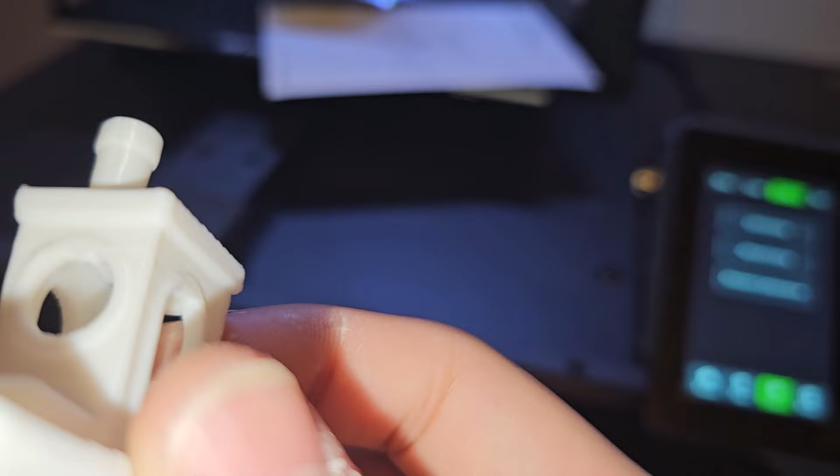Whoa, you can almost read the word behind there. 0.18 differences. Wow, wow, wow. This is actually impressive.

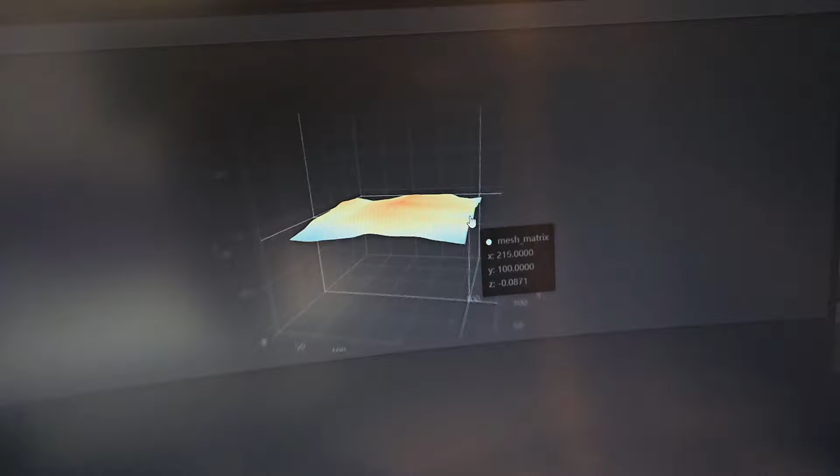I got a new 3D printer. Let's scratch today's 3D printer. This is the Artillery Sidewinder X4 PRO. The X4 Plus is not out yet, and I would love to get my hands on that one compared with this one. But for this video, we've got the Sidewinder X4 Pro.

I will first unbox this, then I will do some B-rolls while explaining the specs of this 3D printer. This video will be an unbox, review, and first impression.

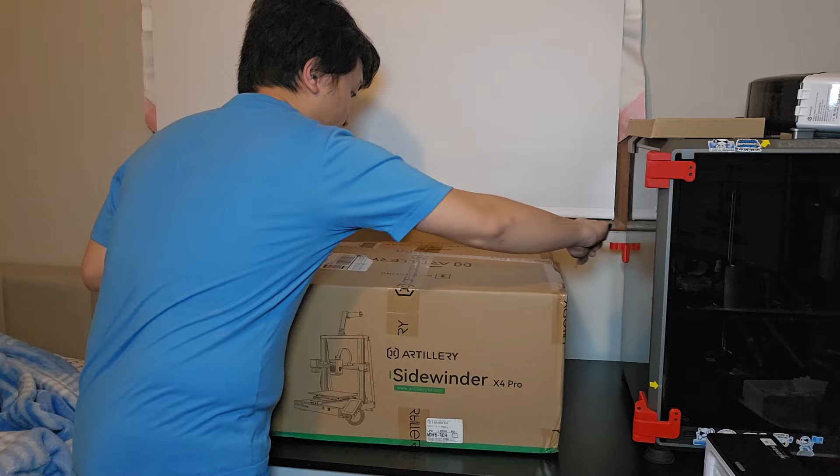You get some user manual. You get some accessories. Whoa, that is actually a lot of accessories. Okay, it comes with 2 rods, spool holder, mounting spool, 4.3-inch touch display. Okay, you got the upper parts here. Some more foam packaging. You get the base part and a power cord. Let's go.

Oh, look at that. I'm gonna go over all the accessories that you get in this package. You get a filament snipper, a filament scraper, some grease, a little filament tester. These are M4 x 18, 4 M5 x 40, Allen wrench, nozzle cleaner, USB nozzle, and some zip ties, and a tube. You get some wire clip.

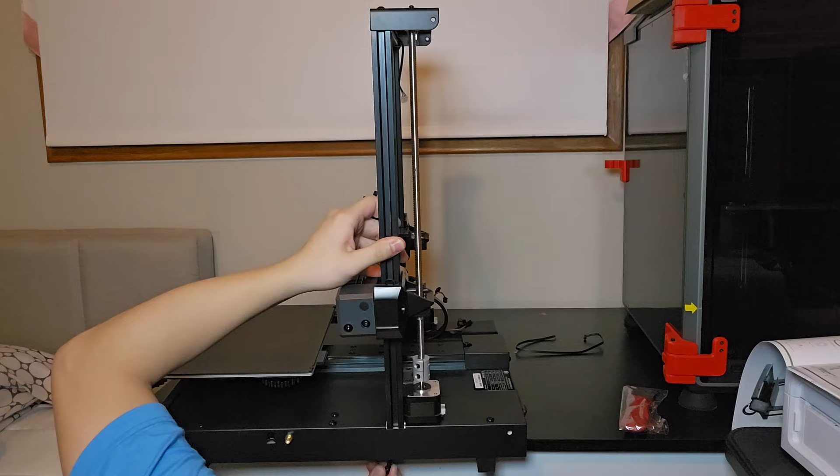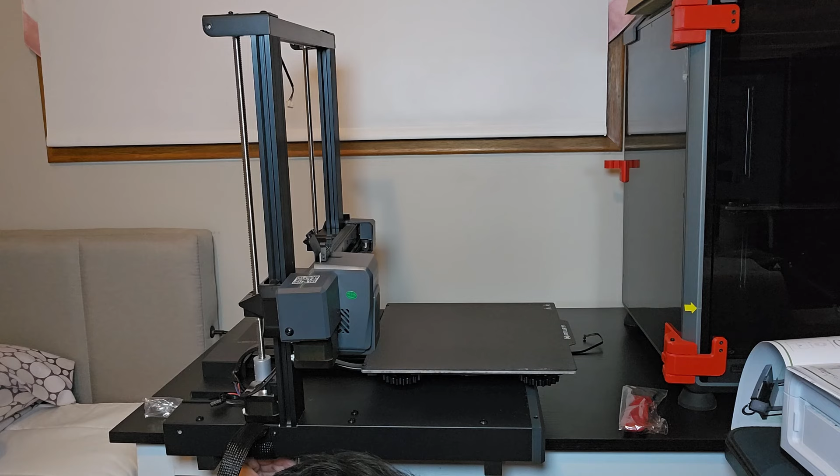Let's go. Now let's assemble this printer. This is Artillery Sidewinder X4 Pro. It has a print volume of 240 by 240 by 260 millimeters. It has a max printing speed of 500 millimeters per second.

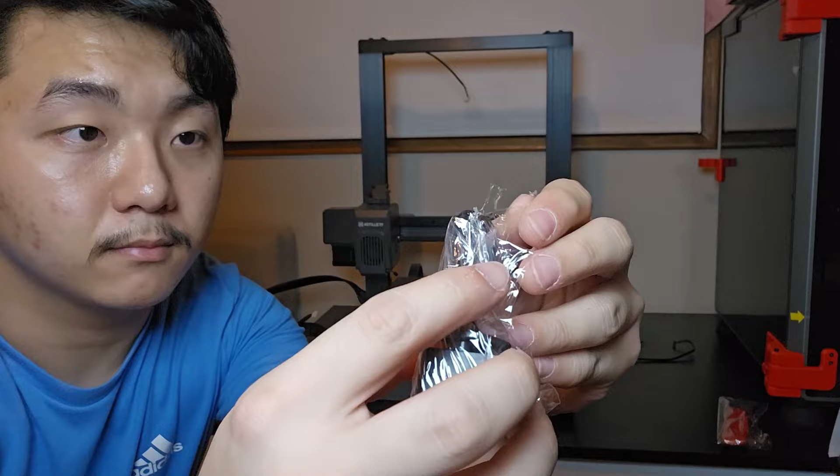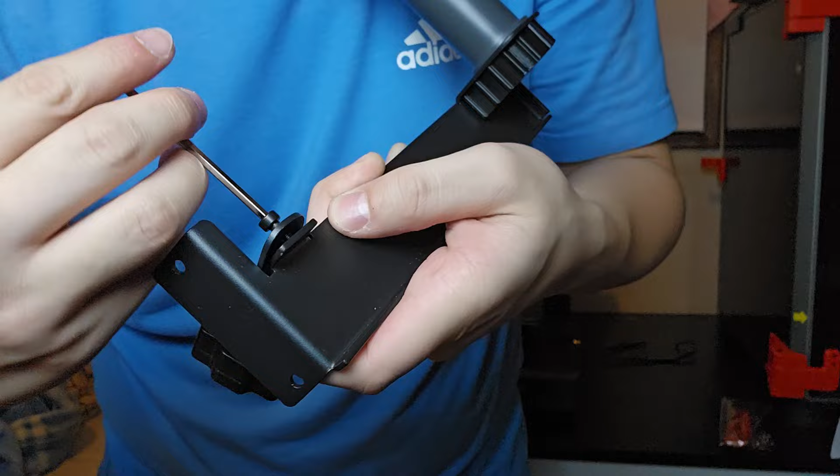It comes with Klipper firmware, pressure advance, and input shaping. It has a reliable metal linear rail structure. It has a 9x9 points auto leveling. The nozzle can go up all the way to 300 Celsius. This Sidewinder X4 Pro has Wi-Fi, USB, Type-C transfer of your G-codes. It has resume printing. Let's go.

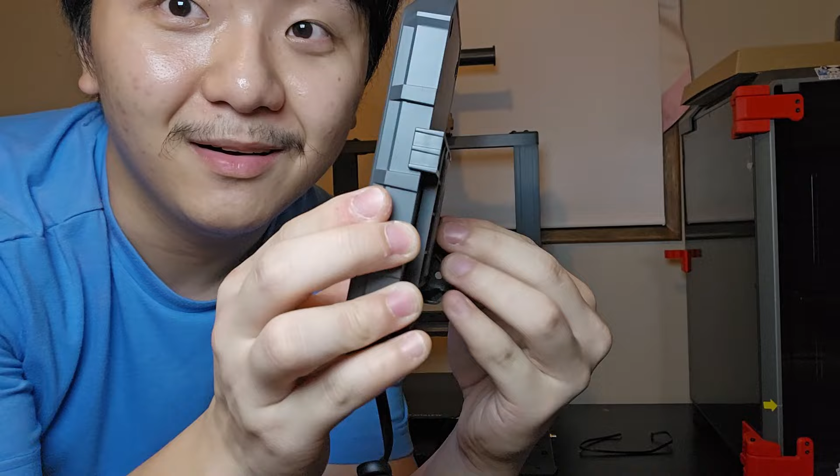Look at this. It's magnetic. How cool is that? It's magnetic. I would love to see more 3D printer companies do this with their touchscreen.

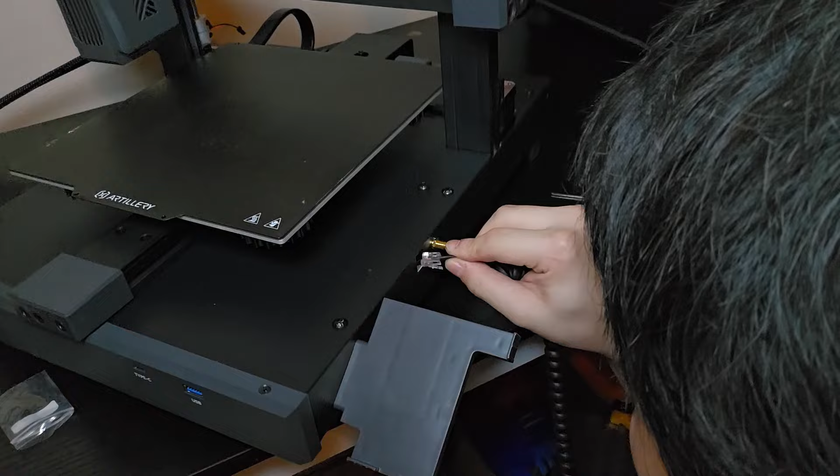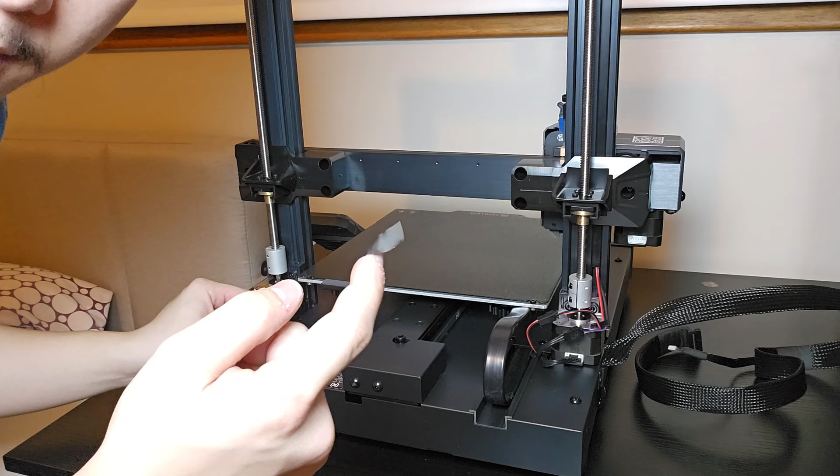It features a dual pole rod structure at the back of the 3D printer to stabilize everything. It also features automatic nozzle cleaning at the back of the build plate. This printer can accelerate up to 12,000 millimeters per second squared. It has a dual gear direct extruder. All the linear rails are all metal. Yeah, that's the spec of this Artillery Sidewinder X4 Pro.

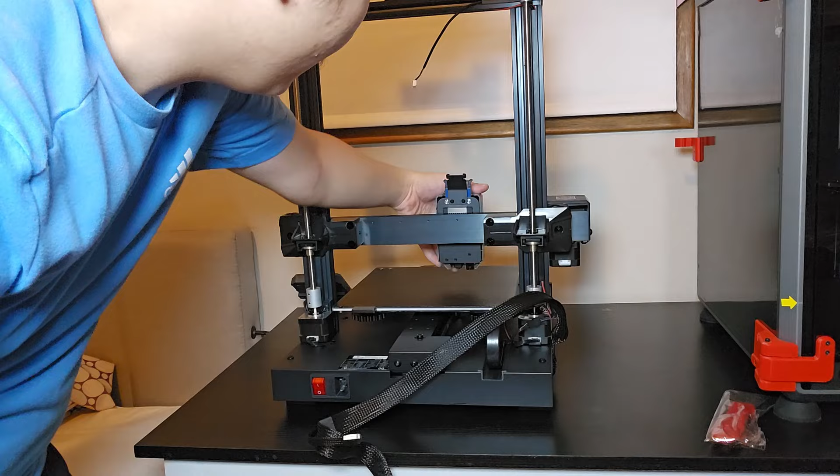Ooh, that is so smooth. There's no wobble on the head, which is very nice. It also has a clip right here to hold it. We're gonna use this R-type clamp, place it right here so that we lock this in. To be honest, I don't really think this is actually needed because this wire is long enough for the head to go all the way over here without interfering with this wire, but it's good to have.

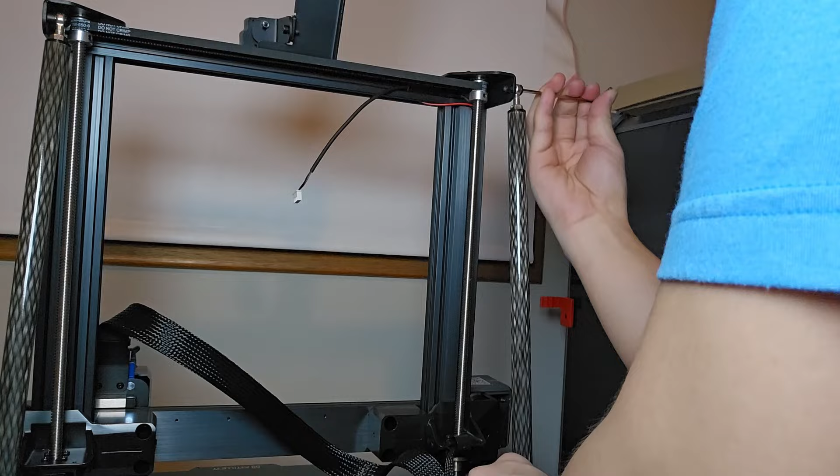Now we're gonna install this tie rod. We just need to secure these bolts so that it's not loose. Okay, well, I think we are pretty set, but in their instructions there's nothing about this wire up here. I believe this is for the filament runout sensor, but the instructions don't cover that. So I'm just gonna plug it in right now.

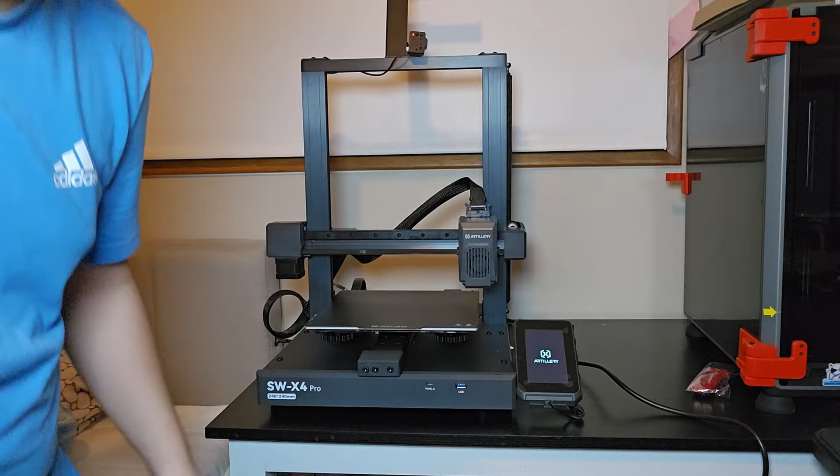We are complete. Now we just need to power this printer and we will go for our first test. I'm gonna turn it on. And would you look at that? It's working! Oh my gosh, let's go!

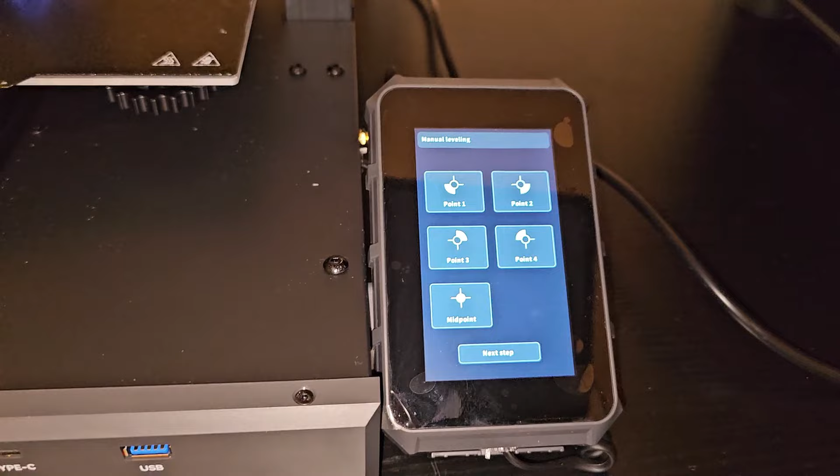Whether to enter the boot interface. Yes. It's actually telling us to do manual leveling, so I guess I'll go over this procedure and we'll get right back to you.

After I manually level the bed, now it will auto level the bed. Now it's saying something in Chinese. I don't know what it says.

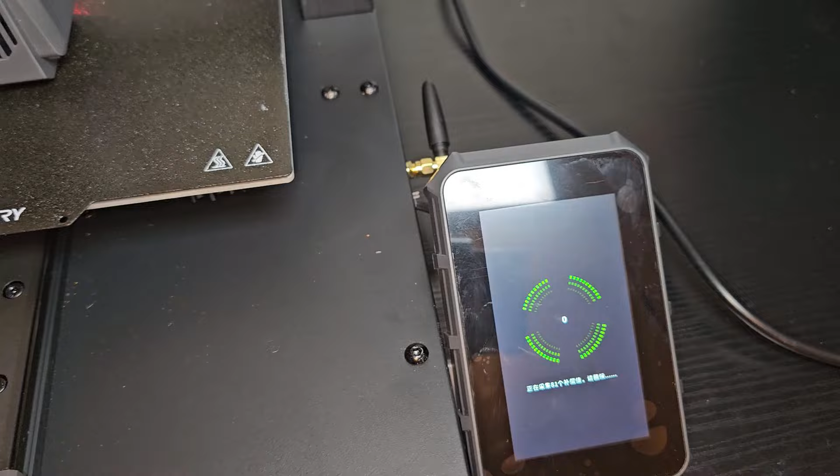This Artillery Sidewinder, you just put this in and then you just click load on the screen and it will just auto load in the filament. It doesn't have a latch to lock and unlock.

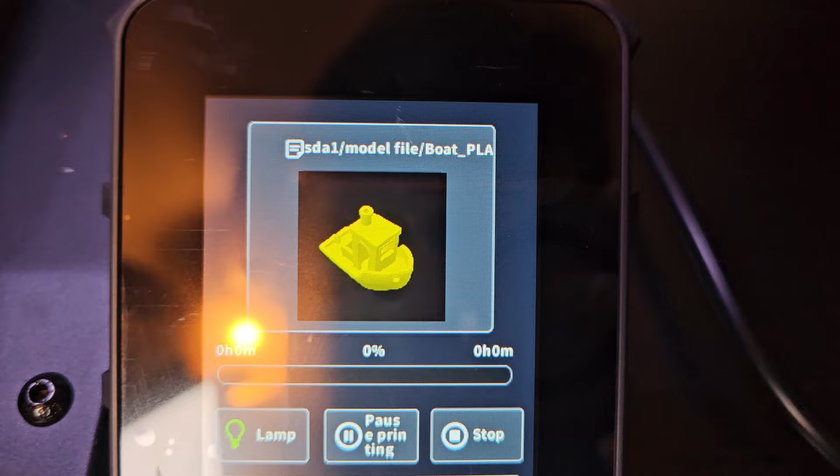Okay, so before we get printing, this Artillery Sidewinder is using Klipper firmware and you have a Fluidd interface here. Okay, right now I'm printing the Benchy, which they call it boat PLA.

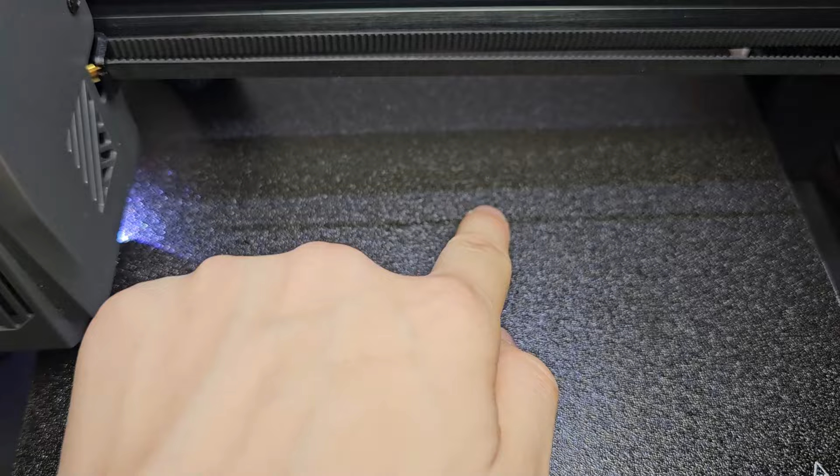Holy frick, what happened there? Yo, look at that. What the heck? They just dig into the bed like crazy. What happened?

Why does it keep doing that? I gotta emergency shut down the printer because it keeps hitting the bed like that. Bro, this printer's problems. Why does it keep hitting into the beds like that?

Okay, finally did the auto bed leveling. I was confused why it did not do it because it says that it has an 81 point leveling, bed leveling. I was confused why it did not do it. Now it has done it.

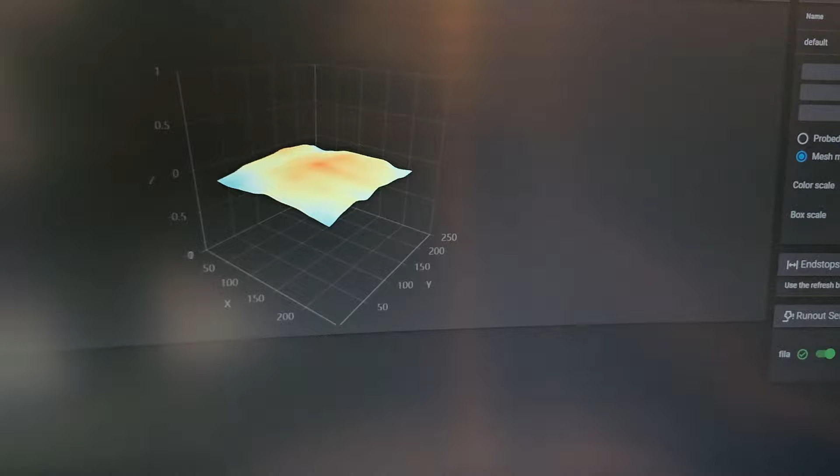Let's save it. Let's restart Klipper. As you can see the bed leveling right there, it's actually pretty darn level. It's only the middle portion that's kind of bendy upward, but everything else is perfect. Look at this, it's a range of 0.18 differences.

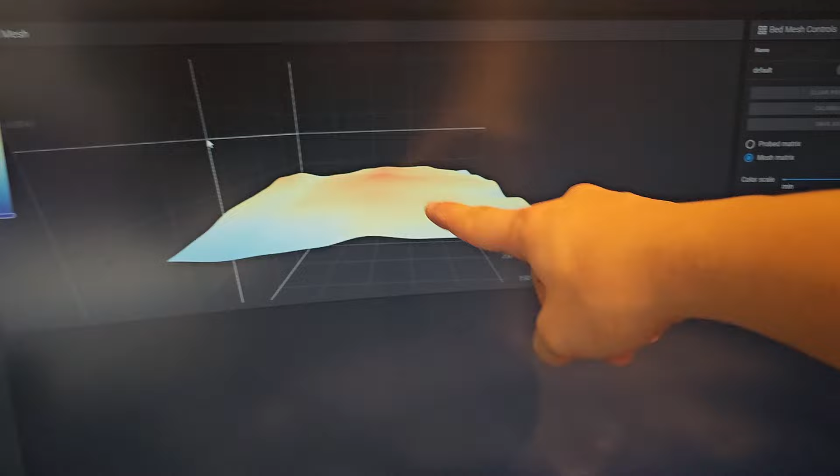Wow, this is actually impressive. Look at the bed, that is so nice. Hopefully it will just offset the middle part a little bit, but oh my gosh, this is a really good bed leveling system. So let's print and see if this will correspond to the printer.

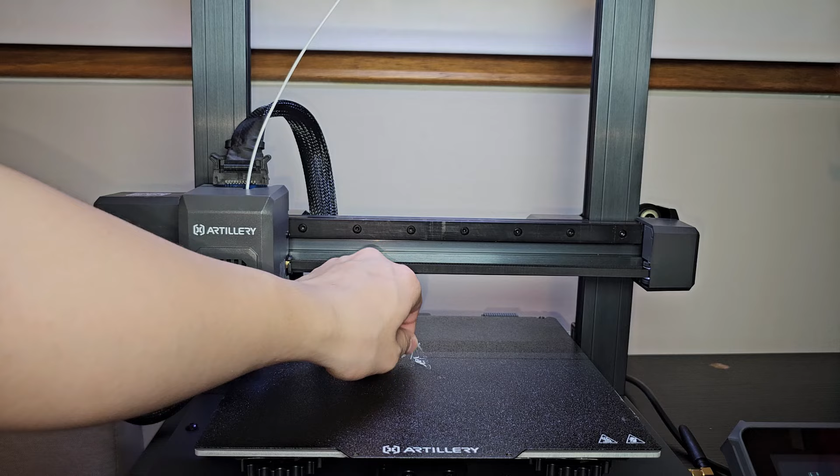Let's go. Okay, apparently it was printed way too high. It's not adjusting to the bed. Let's do one more print and see if this will work. Okay, that's so much better now.

Okay, that seems perfect. The Z offset seems perfect right now. While this is printing, I am going to their artillery slicer, and it's apparently a copy of Prusa slicer.

So it's like something is scraping. There's something that I forgot to take off.

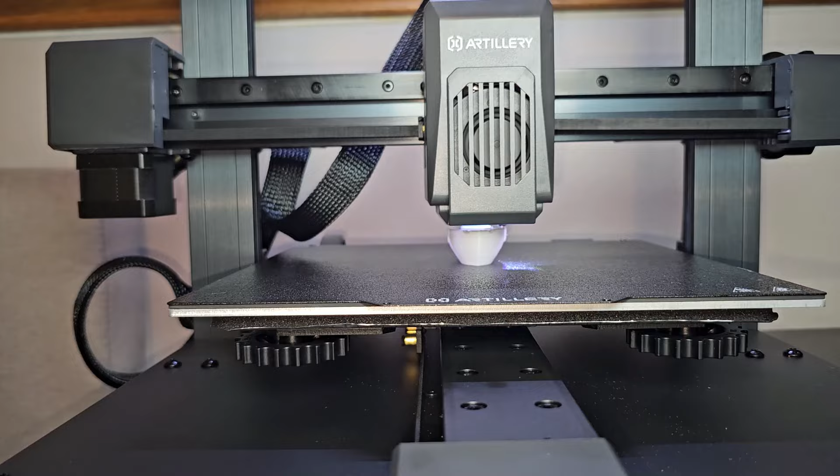Okay, well, it's done printing. You can see that it took 40 minutes exact. Try taking this off. Okay, remove the build plate and just pop it right off.

Woo, that's amazing. I'll show you how this happened. Then we will take a look at the Benchy. I'll show you exactly how the bed leveling happened.

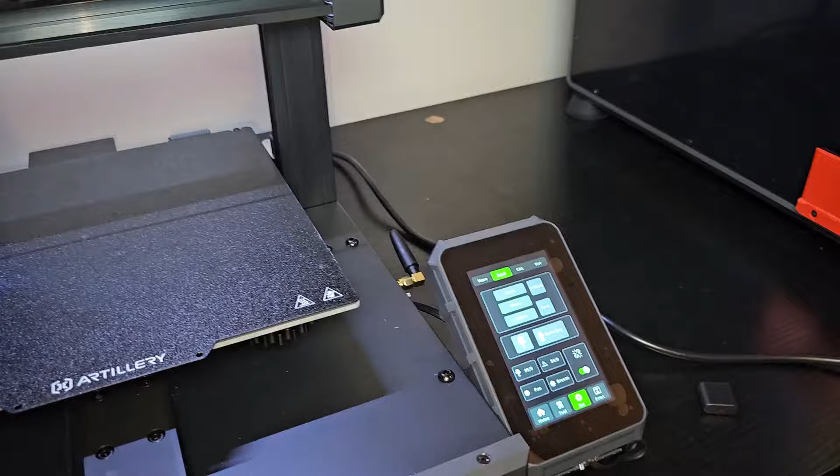So we go to Cal right there, and then we go to auto leveling. Yes, then it's gonna do its auto leveling, but it has a manual level in there too. Then it goes to a certain height.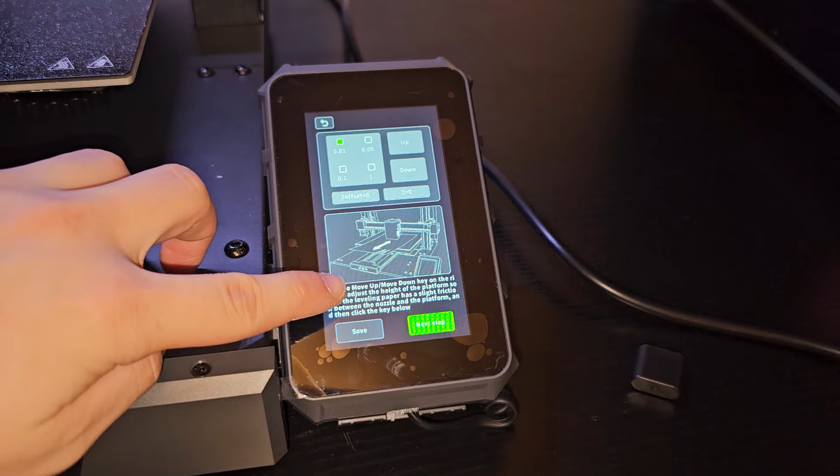Then on the screen here, if you can see that, it says use the move up and down key on the right to adjust the height of the platform, so that the leveling paper has a slight friction between the nozzle and the platform. And then click the key below.

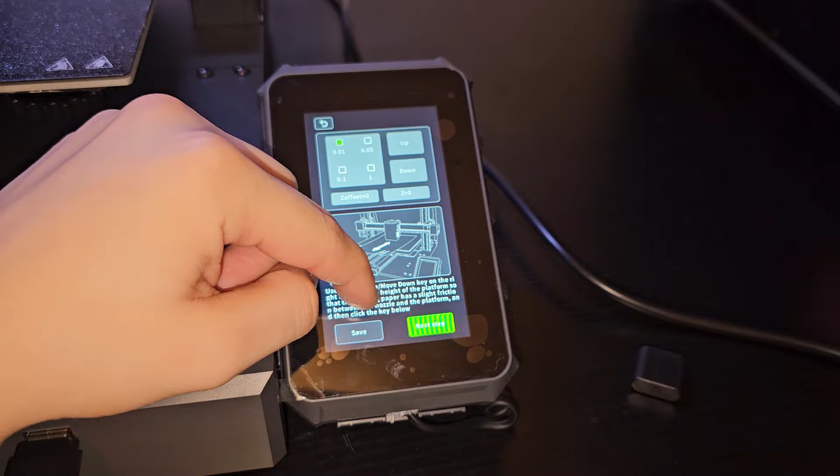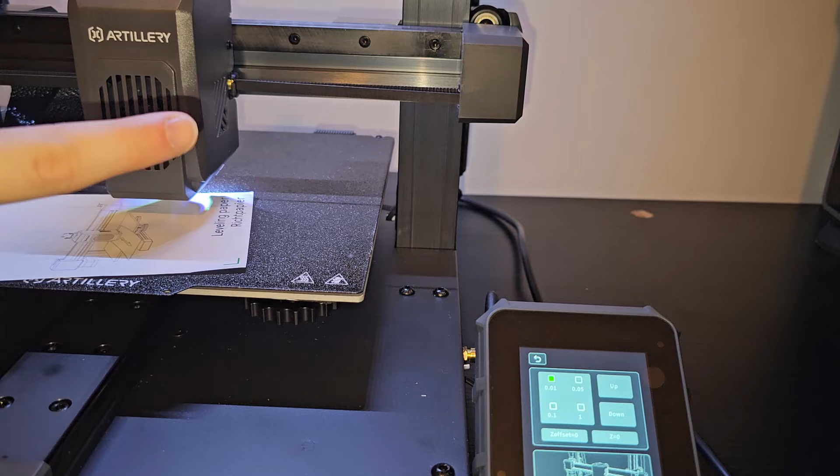You're supposed to use their leveling paper here to do that with the printer over here. But as you can see here, it's almost like a finger thick, so it's like almost 10 millimeters off. So you can't even do it.

I use the up and down arrow key like they say down here. I move it down until my paper is level, or until this nozzle is hitting the paper and I have a little friction.

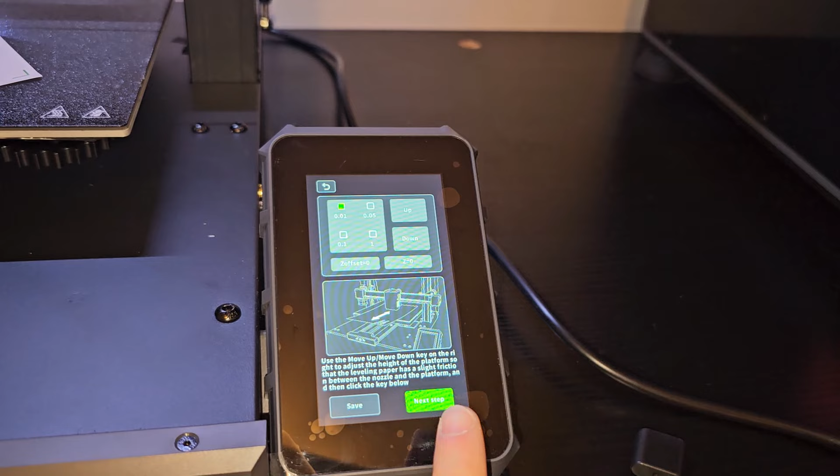So then once I got that, I click next step, and then it gives you the error your Z axis is lower than your Z offset, and that cannot happen. But it doesn't prevent you from printing anything.

So if you print, it's just gonna do what it did earlier. It's just gonna go straight into the bed and just destroy or damage your build plate.

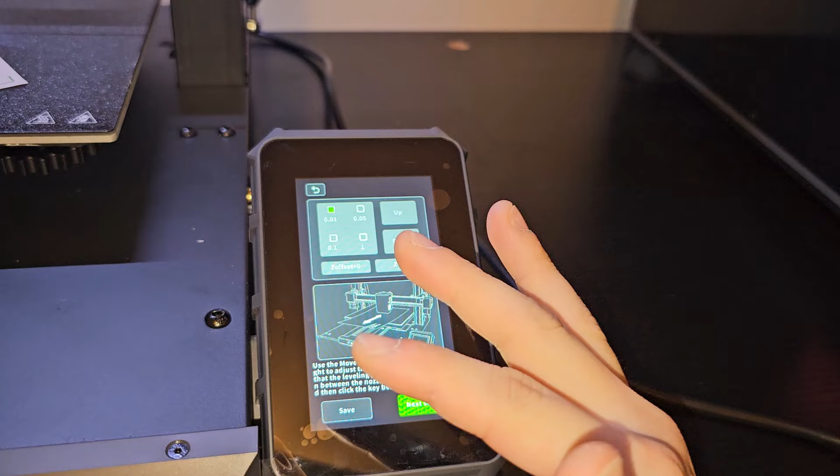They should make this auto leveling a little bit better. You doing it manually right here, I don't mind that at all, because like you saw earlier, you get a really good flat build plate.

But the problem is it doesn't limit you how low you can go. So you can just keep going down until you get friction on the paper, and then that's already way too low. Let's say this hitting the bed is 0 and this is like 10 millimeters off. You go down 10 millimeters right in this screen, that's like -10. So that's way lower than the bed, and the machine doesn't tell you that right here.

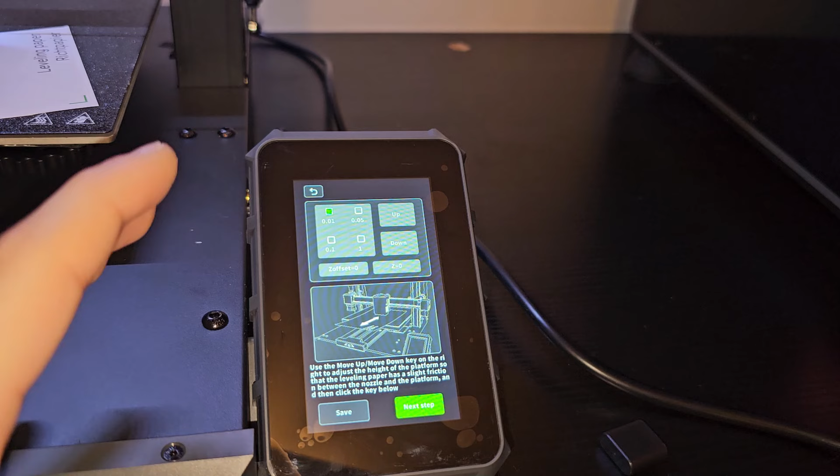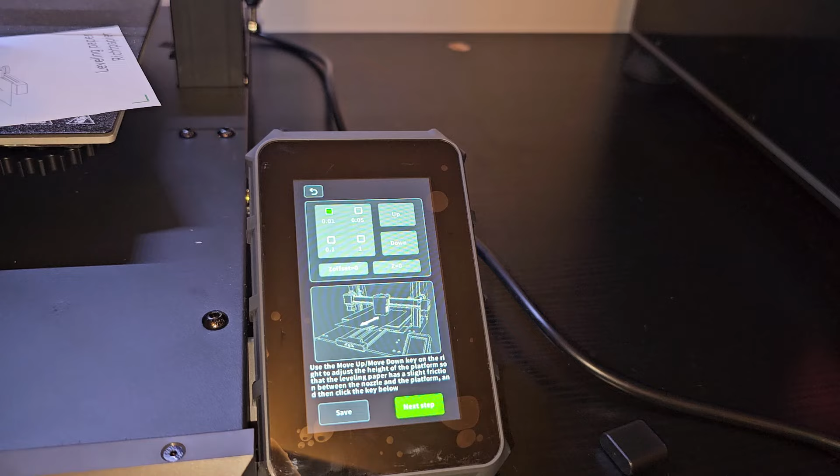Oh, there we go, the fan finally turns off. The printer doesn't tell you right here, so you don't even know that. You just keep clicking down until your paper has friction, and then once you do that, you click save. It's just gonna be way too low, and that's what happened. Your print head is gonna dig into your build plate.

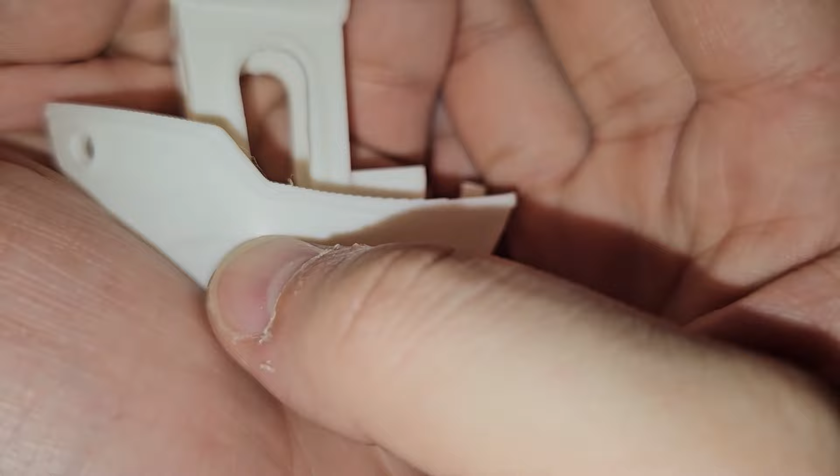Let's look at the Benchy. It actually looks pretty nice. You can see right there, it's like a little black layer right here, which I'm not quite sure about. Maybe that's just the infill. But the side looks nice.

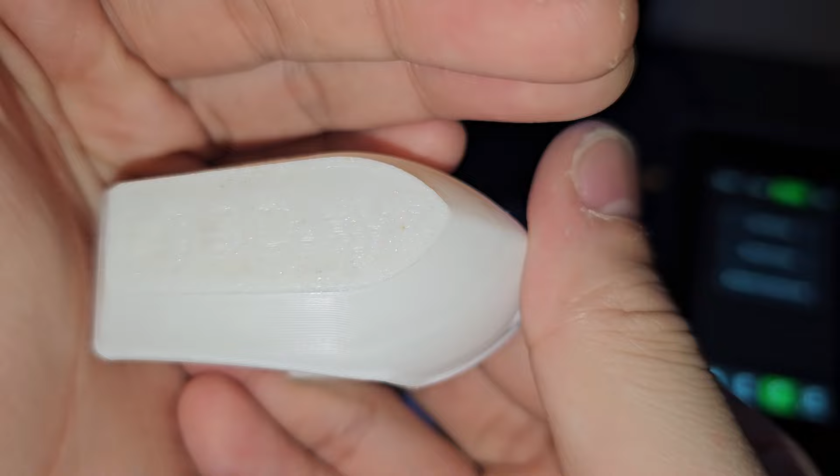The bottom isn't that good because the Z offset was kind of off. I gotta adjust it. It has some stringing right there.

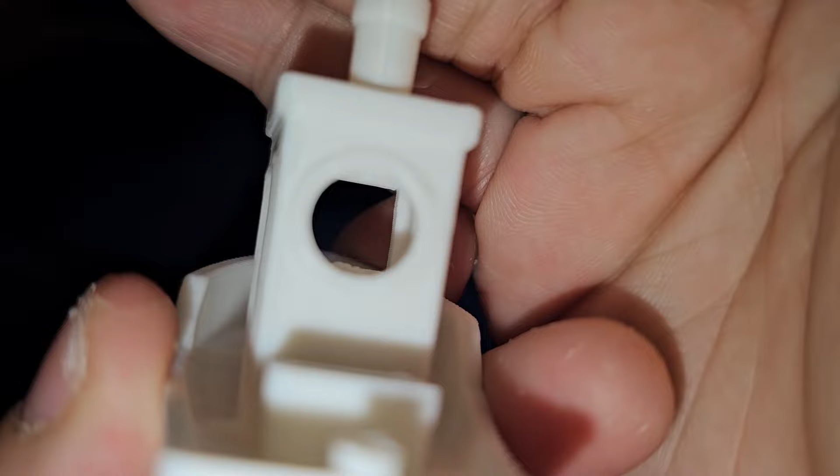Let's look at this bridging. Wow, that's actually a pretty clean bridge right there. But the back hole right here, it's not that clean. You can see that it has a blob right there.

The top of this looks pretty darn good. The circle looks pretty darn good. Look at that, the top layer finish is really smooth. All the top layer is nice.

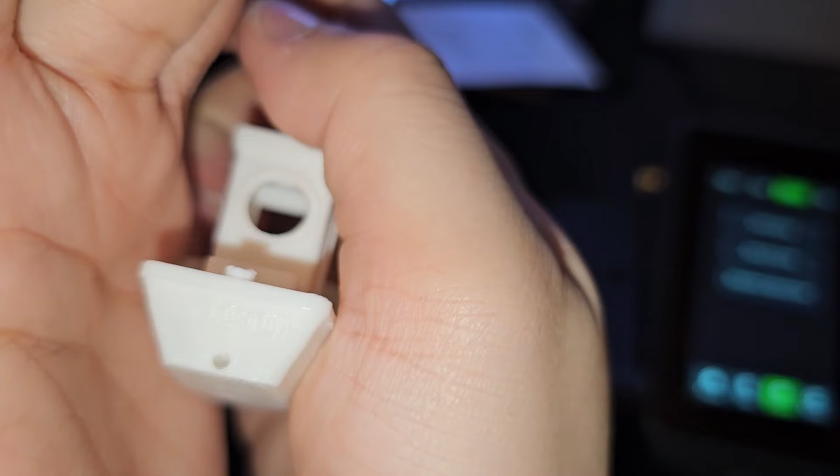There's like a layer shift right there. Whoa, you can almost read the word behind there. Wow, that is very accurate.

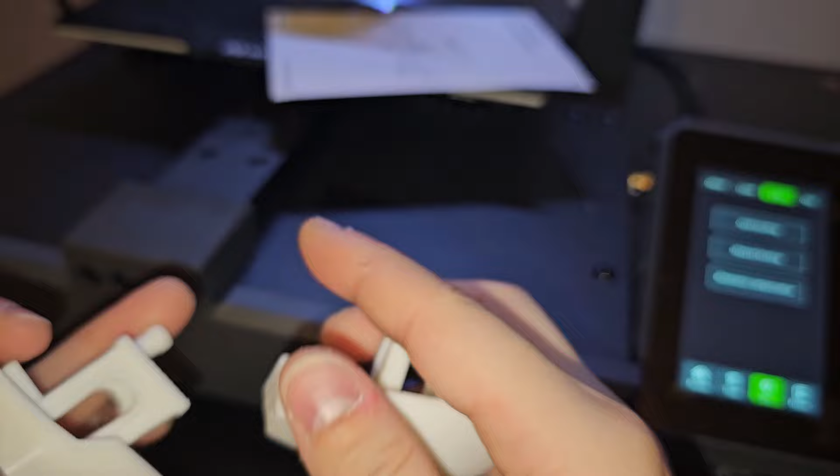Okay, this one is from the K1 Max. And you can see, pretty similar. On the K1 Max, you can see that it has this ringing right there. It has the ringing, but for the Artillery one, it doesn't have the ringing. It's just a smooth layer. Wow, you can see the light reflect off of it.

And on this, you can see that it has a ringy layer. What? Are you kidding me? This Artillery printer is that good?

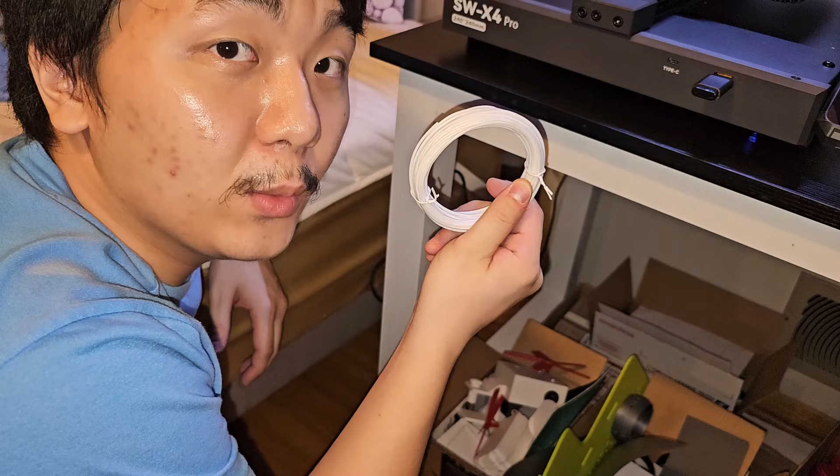Wish they would just give you a full roll of filament instead of this. Instead of doing like this, if not a full roll, at least give like a 0.5 kilogram filament in an actual roll of filament instead of just doing this.

Okay, it's done printing this thing here, but for this I was using Orca Slicer and it doesn't have a preset for this specific printer. So it doesn't know where to park, where to start. It basically just starts printing. It doesn't do the purge, it doesn't do the wipe. I need to get that figured out, but let's take a look at this. It basically finished on top of the print, which is not good.

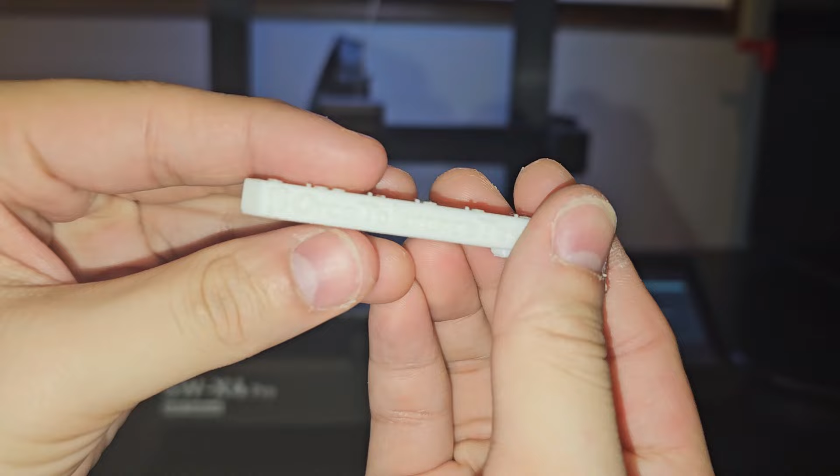This is the Orca tolerance test. We can see that the number is showing up clearly. I did not change anything besides the infill.

0.4, it goes right through. 0.3, it goes right through. 0.2, it goes right through. 0.1, it gets in there, but you can still push it right through.

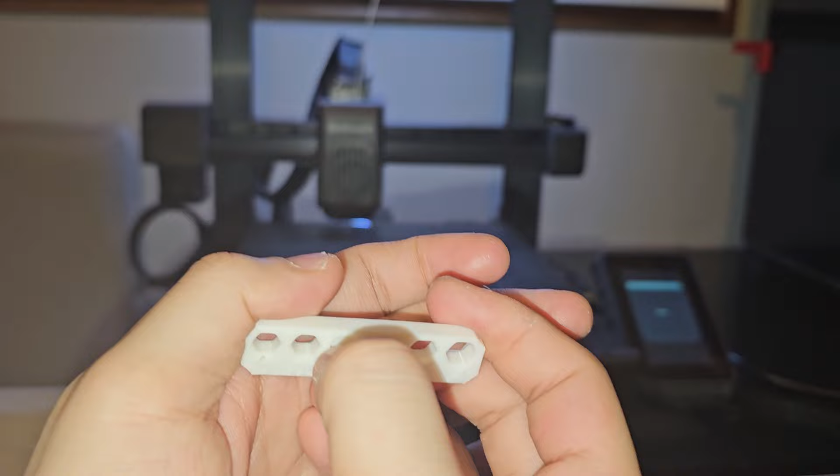Let's see at 0.05. Okay, oh, a little bit of struggle. Okay, 0.05 is stuck, really stuck in there.

Okay, what about 0? Can it fit at 0 tolerance? Let's try the other side. It can, it can. You can force it in there, but it's not like the best fit. It fit, but it's like, oh, you gotta really force it and it doesn't really go in there.

Oh wow, the tolerance goes down to 0.05. It's in there, but it kind of messed up the first layer because the first layer wasn't good on this one. I need to adjust the Z offset again. I don't know why, I need to keep adjusting, and now it's saving, but it's not loading in.

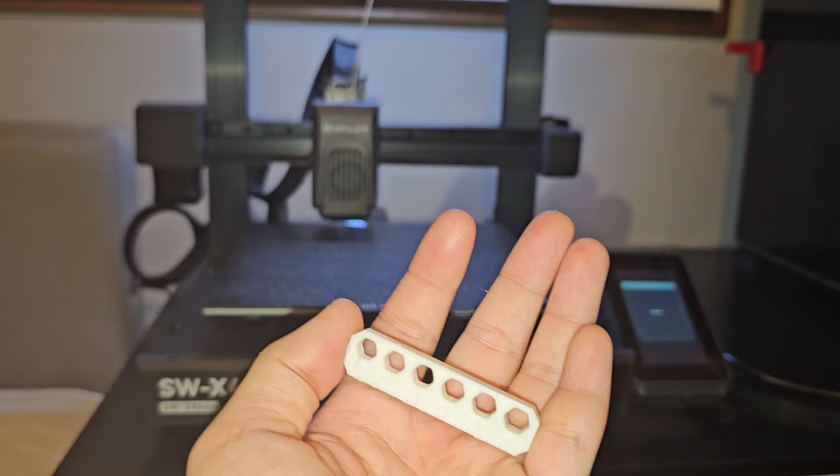The tolerance test is a pass for me. Considering this is printing at, the first layer was 0.05 width, so it fits.

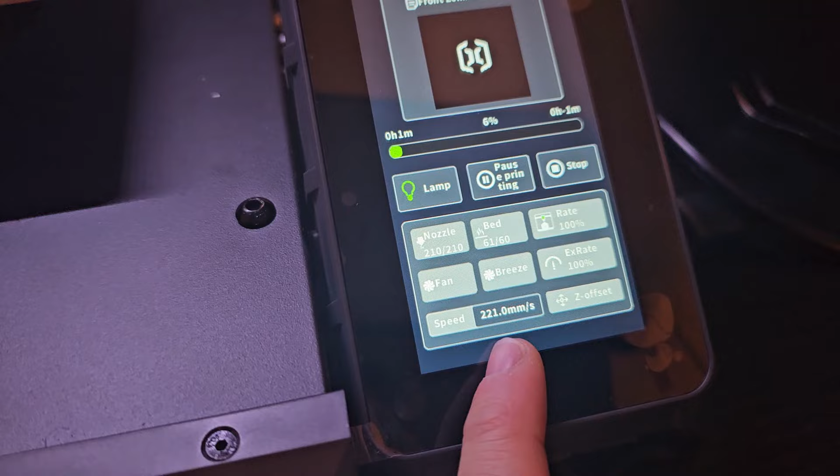So that's really nice. Okay, so for this test, I essentially crank up the speed all the way to 500. It shows you the speed that it's printing at. It's going at 1,000, you see that it's going at 1,000 right there. It just changed. 840, 221, 1,000.

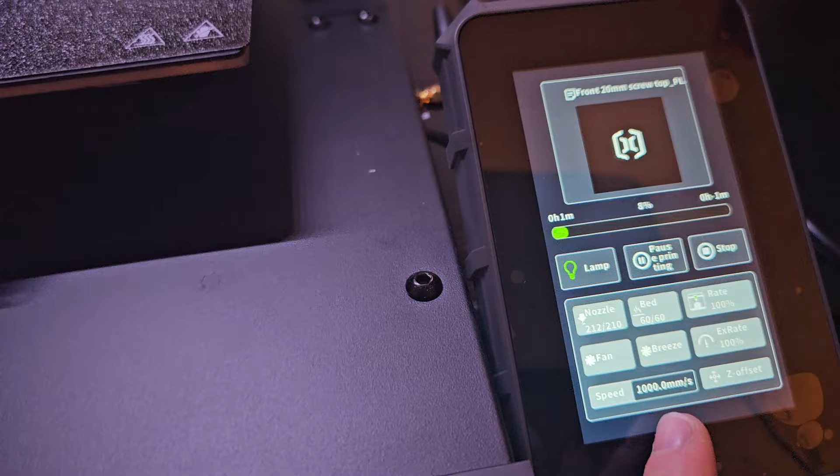Okay, let's look at the 3D printer's printing. Okay, next I will be printing this, a first layer test. I'm using Orca Slicer. It's gonna take about 27 minutes. The speed is gonna be at 105 millimeters per second.

So let's get printing. I have been playing with this Artillery Sidewinder X4 PRO for 2 days now. I basically almost stayed up for the whole 2 days, but that's besides the point. Let's take a look at what I have printed.

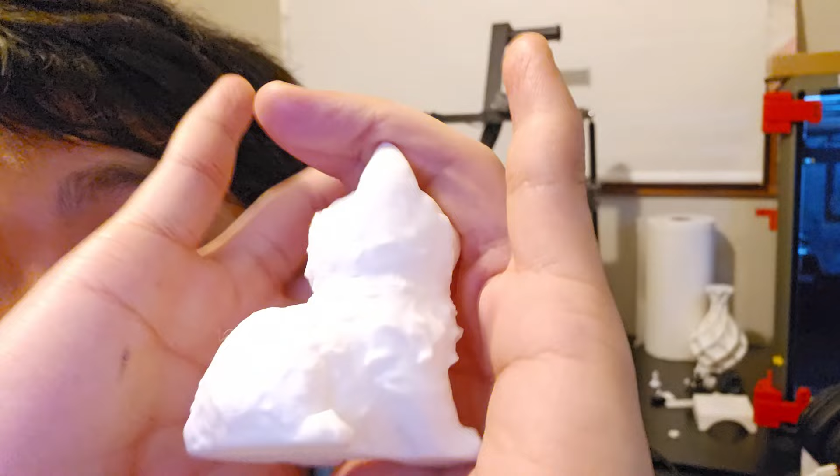I printed this thing that comes with the printer on the USB. The detail in this thing is amazing actually, you can really see all the details. There's a seam right there because the filament that they provided was only this much and it ran out, so I used Elegoo for the other half, and as you can see, it matches perfectly, which is nice.

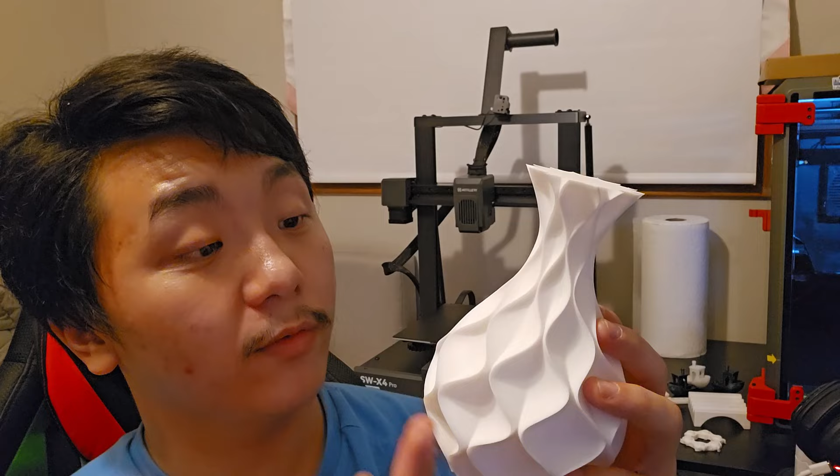That is so nice. The infill is not that much and the top layer even is very good. I also printed this vase. It's a solid vase, it's not like a spiral vase, but I printed this vase and it turns out beautifully. This is one of the most beautiful 3D print models I had ever printed.

I'm not even joking. If you look just like one hand away here, you can't even see the layer lines. It's actually that good. Even with all these curvy shapes, there's like minimum ghosting and stuff like that. If you really look at it, you can see it.

If you just look at it from far away, you can't even tell that it has layers. Even the top layer is pretty good. It has a good infill, only like two lines, and it actually printed the top infill so nicely.

The bed mesh for this Artillery Sidewinder X4 Pro is absolutely insane. With the manual adjustment and then the auto leveling to get the bed mesh, it's amazing. I love that, kind of wish every printer has this feature. It has a wheel at the bottom, you can adjust the 4 sides, and maybe the middle too. Who knows? But oh my gosh, it just printed so amazing.

So essentially this is a speed printer, right? It's rated up to 500 millimeters per second, acceleration up to 12,000 millimeters. But I cranked that up to the maximum it can do, and this is how it printed.

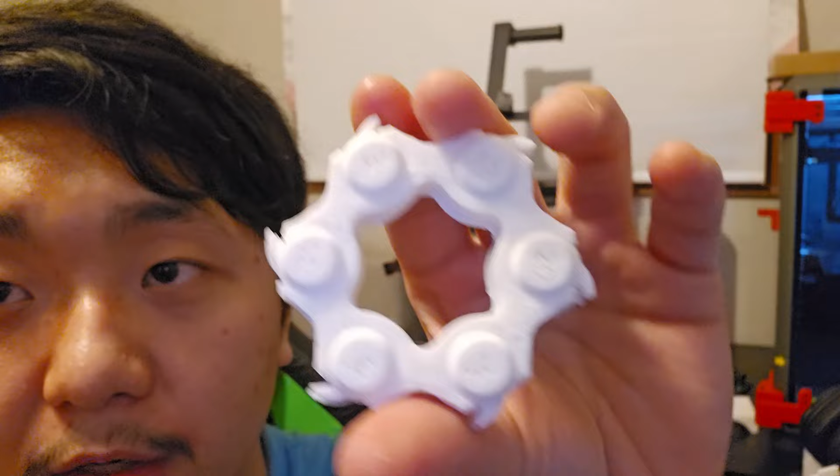I was trying to print this tolerance circle thing, but when you crank this machine all the way up to maximum speed, this is what happened. The layer keeps shifting like this. The first layer is like that, and then the other layer shifts over. It's consistent throughout all of them. I tried restarting this print 3 to 4 times, and the same thing keeps happening. I'm just gonna let it finish. So that's what happened. I was modeling this screw tester thing, but I did a bad job of it.

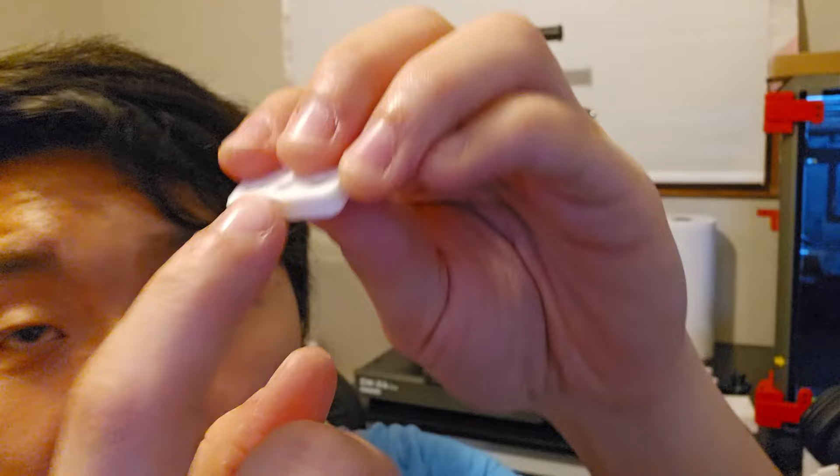But I just want to show you this. It keeps layer shifting like that. The first layer goes down, and then the second layer shifts up. It's not that it's not sticky to the bed - it's stuck really well, but it just keeps shifting. It moves way too fast, and then it just shifts the layer.

This thing cannot be completed without a full bed test. The corners aren't precise to how you manually level them, and they're not actually precise to how the bed mesh shows on Fluidd, because the bed mesh is really nice - it's only 0.2 millimeters off. Without any tuning or Z offset tuning, it should move down in this area and up in this other area, but it doesn't really do that.

I was testing this piece like 3 times, and almost the same thing happened. I had to adjust the Z offset manually. It started on this piece down here - it was really close to the bed, so I made it go up, up, up, and then it was way too high. So I made it go back down a bit, and it printed perfectly in this area until it got to the middle part, and then the two corners where it has the screw adjust on the bottom, it started printing like this. But after that part it continues really nicely, and then it gets near the other screw where you can adjust from the bottom, and it just starts to act up like this.

But it's still very good. If you just print in the middle area, it prints amazingly. With more tuning, I might actually get this printer to print the whole bed like this, to be very honest.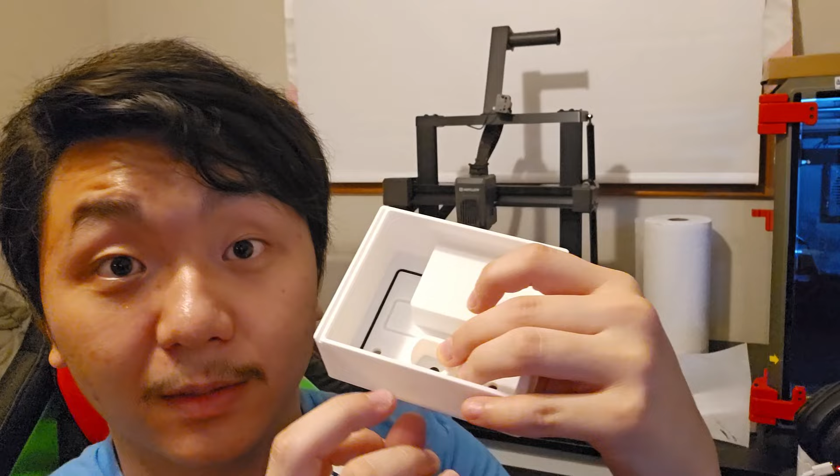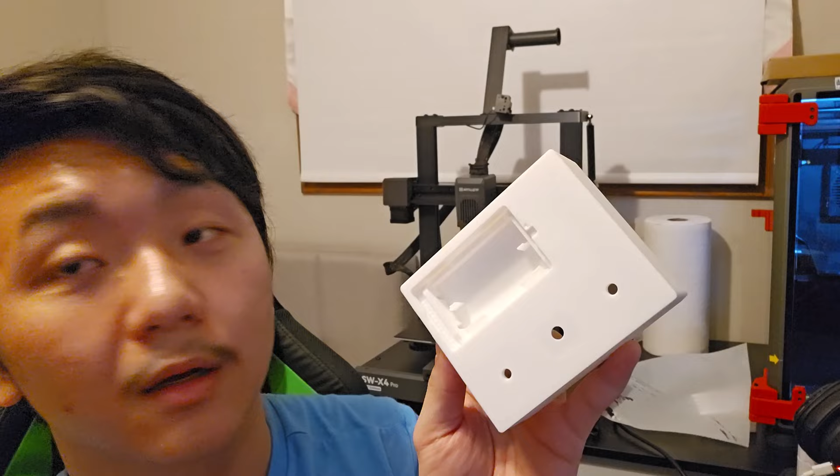So I was making this box for something else, for a motor fan, something like that. The K1 Max printed this piece, and I was wondering, can this Artillery Sidewinder X4 Pro have the tolerance of the K1 Max? Because as you know, the K1 Max has a really nice tolerance. Can this printer fit with other 3D printers? Because some 3D printers can't really do that. I printed this battery holder to place it in here, and look at that - it just goes in so nicely, fitting exactly how the other battery holder from the K1 Max fit.

This Artillery Sidewinder X4 Pro is very nice. Okay, so I believe I went over all the positive things I experienced with this printer. I actually like this printer a lot now. Let's go over all the things this printer is good at.

When this printer prints the layer lines, it prints flawlessly. There's no ghosting, minimum ghosting. It squishes the layer very nicely to the point you barely notice it's 3D printed unless you look very closely for flaws. Besides that, it printed really nicely. As for the tolerance - a couple years back, in my experience, 3D printers couldn't really print at 0.05 or 0.1 millimeters. At 0.1 maybe, but not at 0.05.

But as time goes on, 3D printers are getting better and better. Tolerance at 0.05 is achievable with just some minimum tweaking. At 0.1, it's gonna be flawless, just fit together nicely.

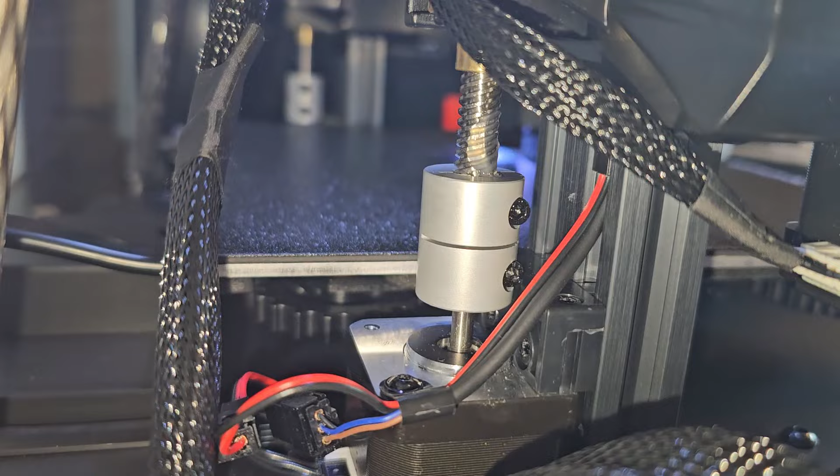The other thing that is kind of annoying is this filament sensor here. It's not completely stable - it has this wobbly thing, and sometimes you feel like, wait, what is that noise? Is something broken? No, it's just the sensor.

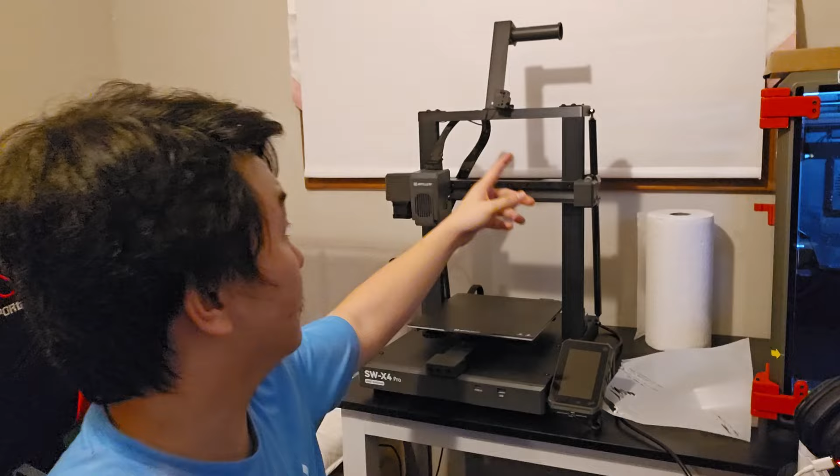One more thing I find kind of annoying - it's not just this 3D printer, it's mostly all 3D printers out there. The motherboard fan, you cannot turn that off unless it cools down and turns off by itself. You cannot do that. Even on the K1 Max, you can't do that without rooting. Most 3D printers can't really do that. I really find that very useful, so I wish more 3D printer companies out there would have that option in the screen so you can just turn off the motherboard fan.

That is pretty much it with my unbox and review of this 3D printer from Artillery, the Sidewinder X4 Pro. Like I said, I bought this with my own money. Everything I say here is basically my opinion and my experience with this 3D printer for the past 2 days.